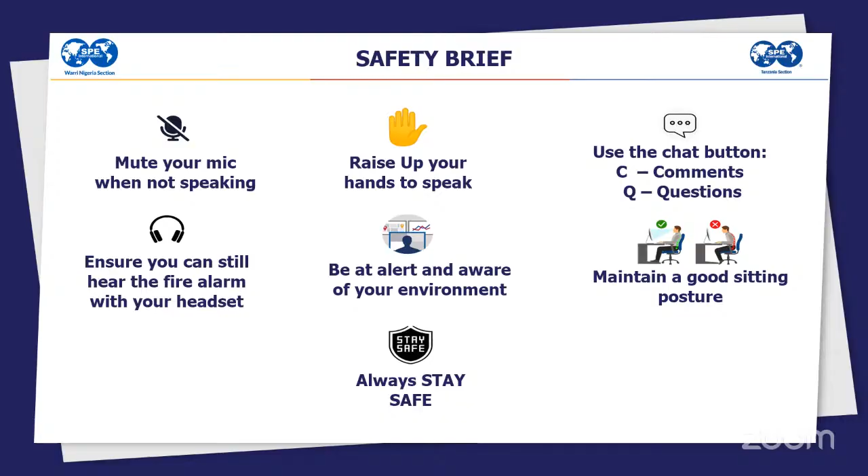Yes, thank you, Ilat. Once again, good evening everyone on the call. You are welcome to this YP's technical session. It's always a period where we gain meaningful knowledge from our industry experts, most especially in this critical era of our operations in the oil and gas industry. So you are once again welcome to this session, and I believe every one of us came here with the mindset to gain one or two pieces of information in this area, especially the dynamics and the relevance of process engineering for sustainable upstream and midstream operations.

Luckily, we have a senior engineer here in the oil and gas industry in the area of process engineering with vast experience at Ardell Holdings. So I just want us to keep our minds open, because when we look at the area of process engineering, it's one of the critical and vital areas for sustainable upstream and midstream operations by way of optimization, efficiency, by way of reducing environmental impacts of operations, and ensuring safety is adhered to. So it is one key area we need to look at to strike a balance between our economic goals, ecology, and our social demands to meet this sustainability we are talking about.

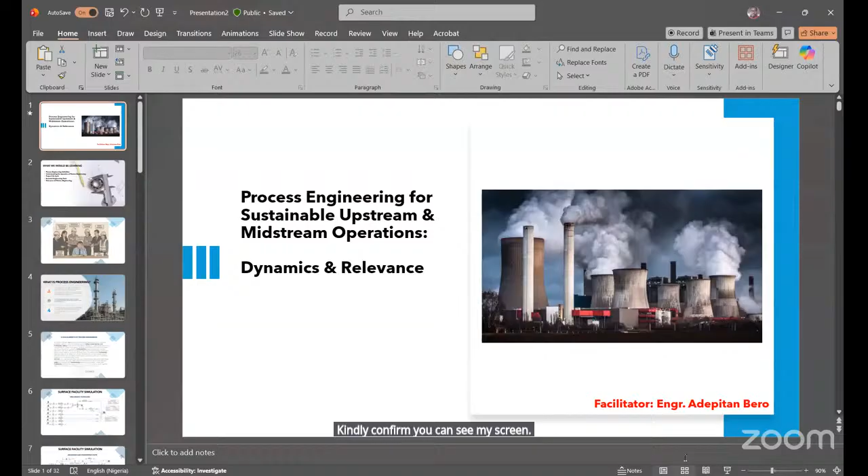Sorry, just a moment. Kindly confirm you can see my screen. Sir, we can see your screen. Okay, all right, beautiful.

Thanks again for this invite. So we'll be looking into process engineering for sustainable upstream and midstream operation, the dynamics and relevance, generally.

So what we will be learning from this technical lecture is organized into five blocks, saturated with a couple of things that will be taken away from this lecture. We're going to look at what the definition of process engineering is, understanding the dynamics of this engineering as it relates to process. Then you'll see a project life cycle, because as a discipline engineer, you'll also be participating in a lot of oil and gas activity and works. You could either be a project engineer on a specific project, or a discipline engineer working with other team members and all of that.

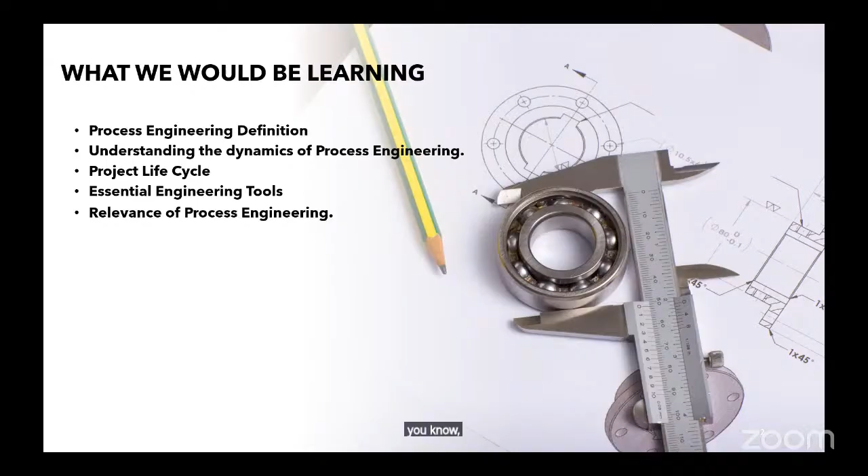Alongside all of these critical, essential things you will be doing, you actually can do nothing without having some engineering tools, which are very critical to building and all you have to do when it comes to process design, and all you need to achieve when it comes to project management. Then you're also going to see the relevance of process engineering in the industry.

Now, please confirm you can see this screen. Yes, sir, we can see the screen. You can continue.

So now, don't be moved by the idea of everybody pointing fingers and trying to blame the guy. This is actually not the way we work in the industry. We work together, coming together to do all of that. But what you see here depicts what you are likely to encounter if, as a process engineer, you do not understand your importance in the industry.

At many forums and different places, I've had engagement with a couple of engineers, young ones, even colleagues. I usually see that whether you like it or not, the process engineer dictates every single thing you see on the surface. And what do I mean by surface? I'm talking about practically everything you can see in terms of the civil engineering works, the instruments that will come at a time, the equipment, the mechanical works, and all of that. The process engineer dictates every single thing you see on the surface facility.

Once you get it wrong, there's a 50% chance that everything could go wrong, and you have to go back to the drawing board to make sure everything is properly done. You can't be a process engineer without understanding some basic fundamentals, because this dictates every other single element that comes on stream. Typically, let's say you want to start a facility, you want to build a facility.

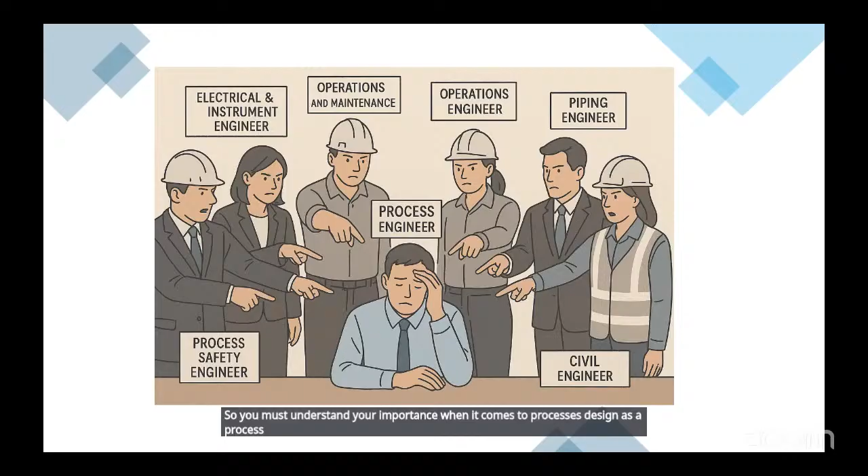So what is a process engineer? We could look at it in a different fashion.

Like I like to joke with friends, say it as it is. We can look at it in a very artistic manner. I mean, you can talk about it.

It's actually where pressure, temperature, pipes, staves, and valves act as notes. The sketch of invisible forces tames chaos into flow, because you deal with a lot when it comes to flow essentially. There's so much that happens when you look at the dynamics of flow and all of that.

I want to balance safety as well, and try to be as profitable as you can, while also making sure that the environment is not fouled, and you're doing the best you can to keep our environment safe. You can also look at it from the basic way. If you're talking to a new entrant, we all did physics and chemistry as it is.

When you look at it, we say process engineering is where physics becomes architecture and hydrocarbons learn to dance to the tune of chemistry. The pipes you're looking at are physics in nature, mechanical, and they help guide the chemistry of flow that happens in the pipe.

Looking at it essentially as a process engineer, from this terminology and full definition, in the oil and gas industry it is a discipline, right? Where the discipline engineer controls the physical elements, transforms the chemical reaction, and converts hydrocarbon streams into reliable products, while optimizing safety, efficiency, and environmental stewardship.

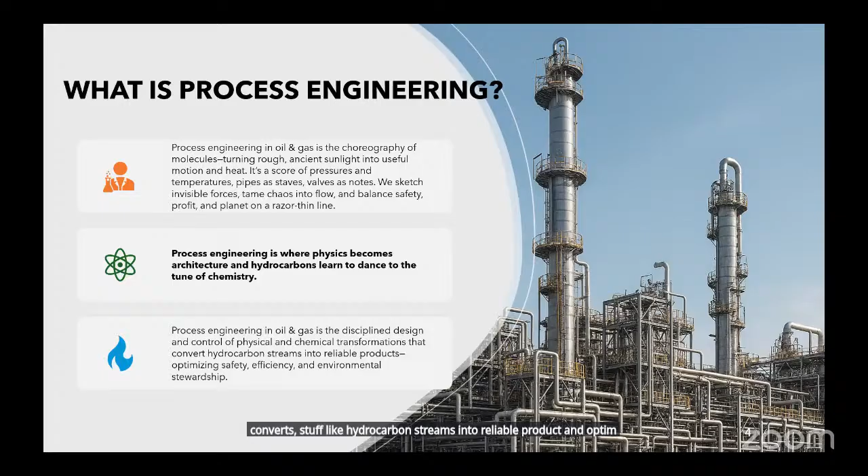As a process engineer, there are three cores that we like to speak to, which are the guiding principles to all of that you look at, because you are building a process. One thing you must take cognizance of are these three elements that are very critical.

Building a project from scratch, from the moment you get a project charter from the management, when it comes to the executive level, to the practitioner themselves, all the way to the shop floor - so you have those elements.

Safety is very critical. When it is not safe to operate, then it is not worth the investment. It makes no sense. Sustainability -

are you building for tomorrow? Is it scalable? How does it interact with the environment, all of that? You need to look at a couple of things, how you handle your water, your flaring systems, quite a number of things. You can build a facility, for example, and I'm sure it's something a lot of us are familiar with in our industry.

One of the things that is frowned upon is the flaring of gas. Of course, you flare gas, but there is also a commercial side to it - flaring is something you can actually commercialize.

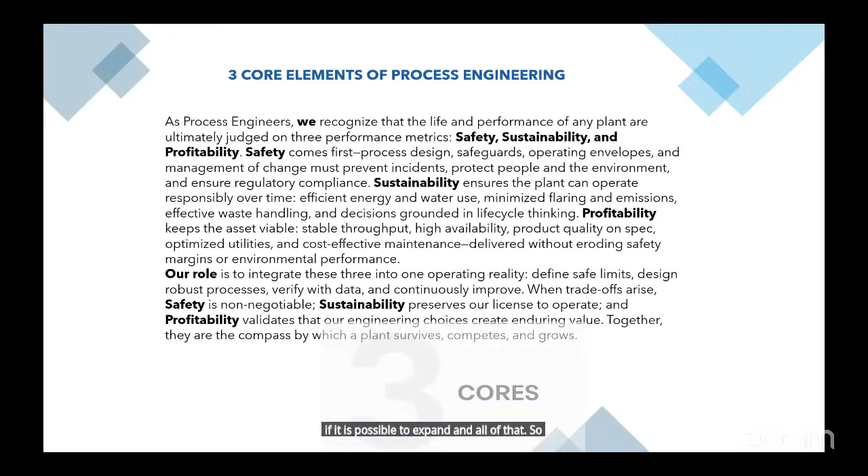Now, why do I have this screen to share with us? I'm sorry, a couple of us may have come across what I have on my screen - it's actually a surface facility design, a very integrated facility. This is some of the past design I've done, and these are simulations we built that speak to what our live plant is.

So these are the different streams of wells. You have the flow lines, the valves, the manifold. With the way this integration is - of course I didn't capture it here - the NAG separator helps stabilize the condensate, which is the gas well, the non-associated gas coming into the facility, stabilizing it at about 950 psi.

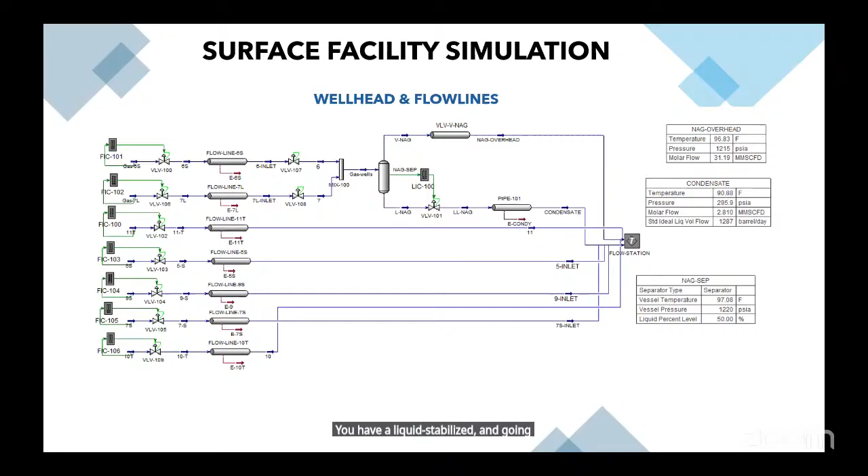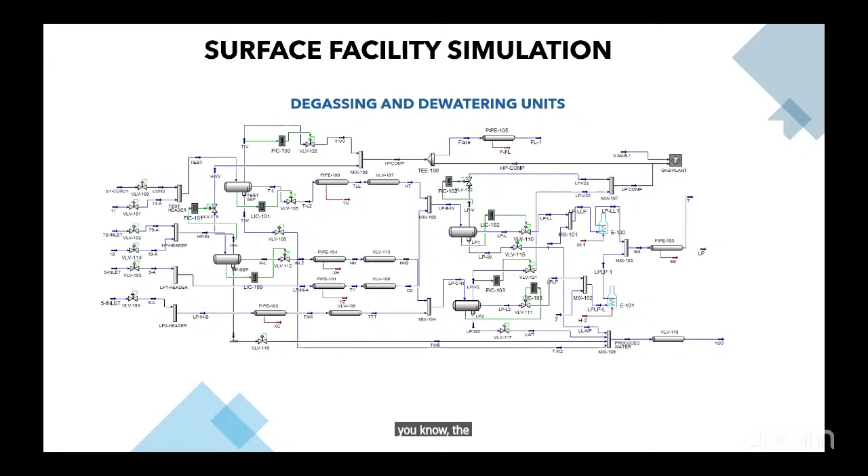You have a liquid stabilized going down into another integrated facility, the flow station. You also have different streams of wells that are AG wells, which I call associated gas wells, typically API around 35, 36, 42, all the way down to the heavy. So this is the place with the gas and water streams of fluid, and you have the overhead going into the gas plant compression system.

This is the compression system where the gas goes into a couple of units like the scrubber. The scrubber helps scrub off the gas entrained with liquid, like H2O. Of course, you have an element of hydrocarbon condensate as well. That moves through different compression stages, depending on the compression ratio, probably taking it from 150 psi all the way to 350, then up to 950.

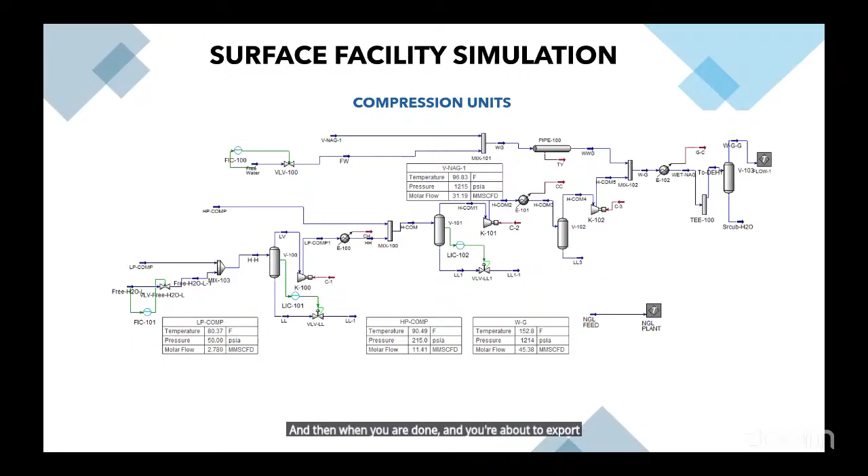When you are done, you're about to export. You're now taking it into some form of trade, to the height, the level, the stage at which it can then be injected into the LNG stream. When I mean LNG line, that's where you export out.

In this particular unit, the gas stream has to go into the contactor, making contact with a liquid desiccant called triethylene glycol to help mop up and strip off H2O from the gas stream so that it is dry and meets the right specifications. Onward, you do the reboiling system, having a recycle system, all of that happens in this system. Then you check the specification, and if it's right before it goes into the LNG line, you push to export.

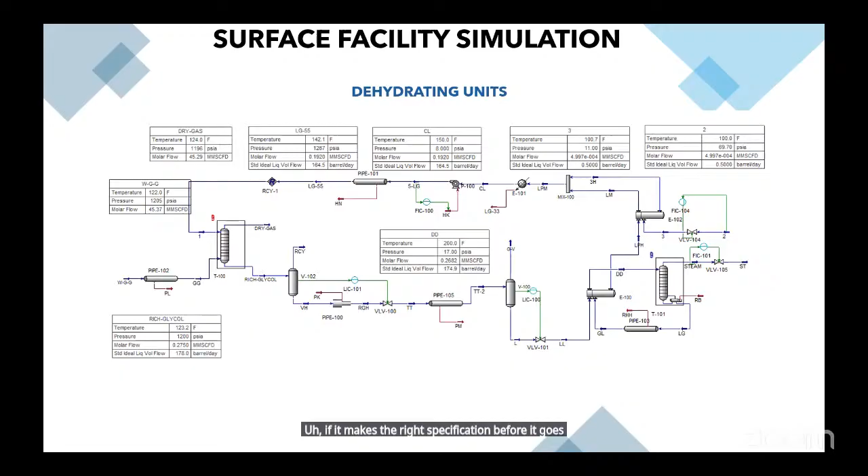Now, what I just showed is simply one of the elements of what you do as a process engineer, which is there are certain things you must put together in order to get to that point.

Design, simulating the process—you want to know what happens. Like I mentioned, a couple of things we speak to when you talk about the design basis element and all of that.

However, you could have all those elements beside, jotted out somewhere. You have done research on the requirements. Perhaps the executive has told you, look, we'll be doing 100 million SCF, that's our target from the subsurface and all of that. You put all of those together and you're about to simulate, going into all kinds of things.

So there are a couple of engineering tools that are very critical to what we do as process engineers. I want to quickly run through a few because I know I'm probably running out of time. So now, talking about process design...

I have a couple of other software you can use for the same objective. Unisim also does something related, made by Honeywell. They have Pipesim, typically for flow assurance, checking what happens in your pipe, the different kinds of flow you can have—whether it's going to be slug flow, multi-phase, and all kinds of things.

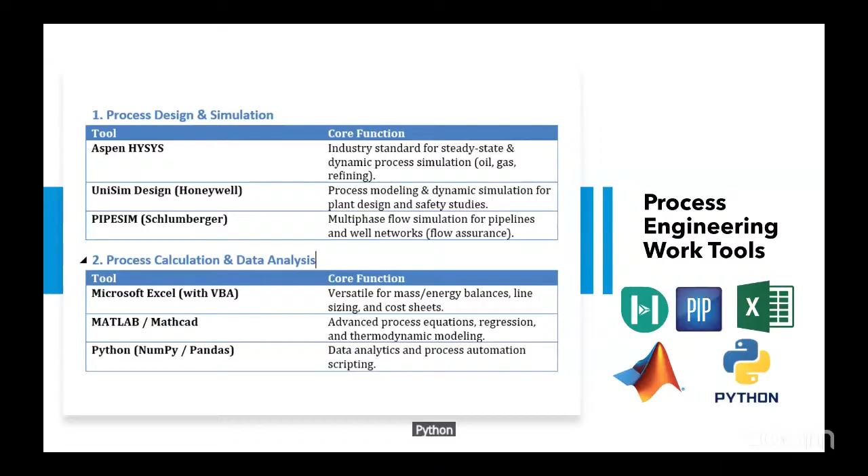AutoCAD is very, very critical. These are some of the platforms, of course I have all of that here. You may never get to use some of them, but there are certain ones you can't run away from.

Because these are some of the dictates of what you do today as a design engineer, even as architect or other discipline, they use some of these tools. AutoCAD Plant 3D is where you'll be doing your P&ID, block flow diagram, all those elements required for the project phases. You'll also be looking at how to analyze your process, whether it is safe. Aspen Flare System Analyzer, you want to see what is the required threshold, what you're putting somewhere, what kind of PSV are you having, what kind of release system you're adopting.

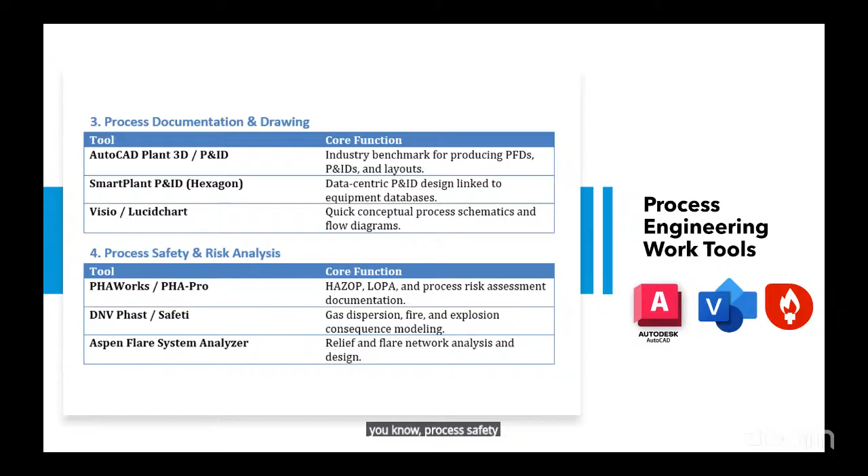Understanding the basis of your design, understanding what is required, understanding their limitations and all of that. You're going to subject them to process safety and risk analysis. Equipment design, yes, HTRI, some of us, there are industries where we may never come across heat exchanger designing.

I have worked in a facility that has all of this, and this is one of the beautiful things about Aradel. Aradel has an integrated facility with a gas plant that helps dehydrate gas from NAG wells. You have a flow station with AG wells, also degassing the crude, around the envelope of maybe 150 PSI to 250 in operation. The stabilized crude, if it's fit for the refinery, we also send to the refinery.

So Aradel has all of the industry that you can think of, except when we're already going into alternative power sources of energy. And that's what Aradel stands for today.

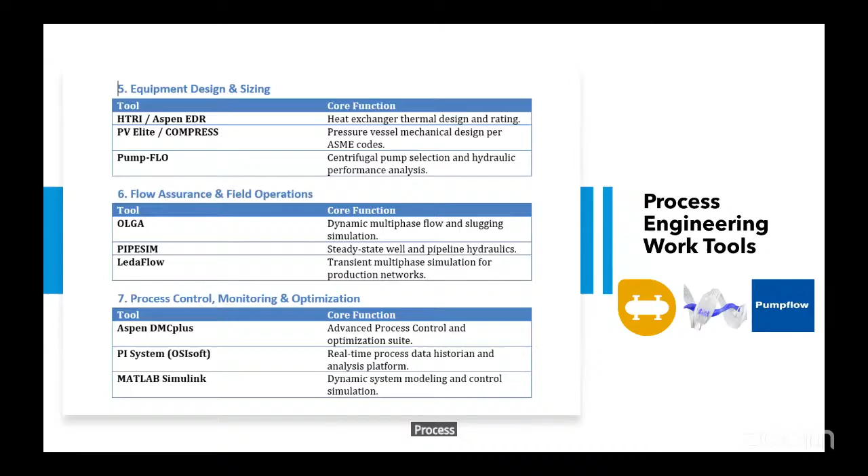So you'll be coming across a whole lot of this equipment, even the pumps. Just think about it. This is one thing I've come to appreciate a lot in my career when it comes to process design. You'll also be coming across things like flow assurance checks, and process control as well, like MATLAB. You'll be doing all of these things.

Projects and collaboration. As we begin to talk about project management, because like I said earlier, you're not just going to be a discipline engineer as a practitioner looking only at your discipline. You'll be working, I manage projects as well. I have a couple of projects I've managed in the past and some I'm doing right now. So obviously, beyond being a discipline engineer in electrical and instrumentation, mechanical, or facility engineering, you will still be managing projects as a project manager, and you will be interacting with a couple of people.

So you must know how to use MS Project, Primavera, and all of that. Your SharePoint, dealing with document control, and all kinds of things.

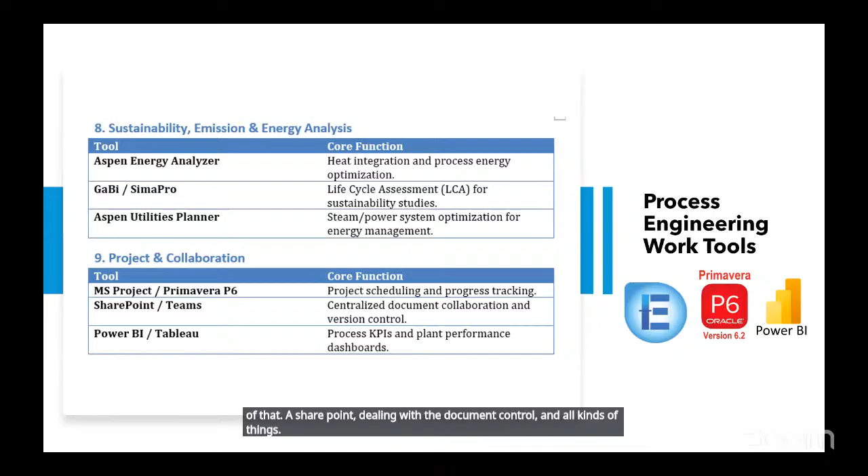Now, we said all these things. You've seen all the elements I've mentioned leading to having practicability, hands-on what you do, and all of that. But what you have on my current screen is where all of these things that you use are put together and delivered.

Typically, when you look at the engineering design process, what it takes, one thing that is sure is that our world today is always looking for something to solve, to solve a problem. And you can't go about solving a problem without first identifying it, doing the research, and let's even just look at it: do we even have that problem to start with? If you don't have that problem, then why go into it? And there's something about invention, which is challenge, and need is the dictate of a lot of inventions you see today, which is you can't go into invention if there is no need for it.

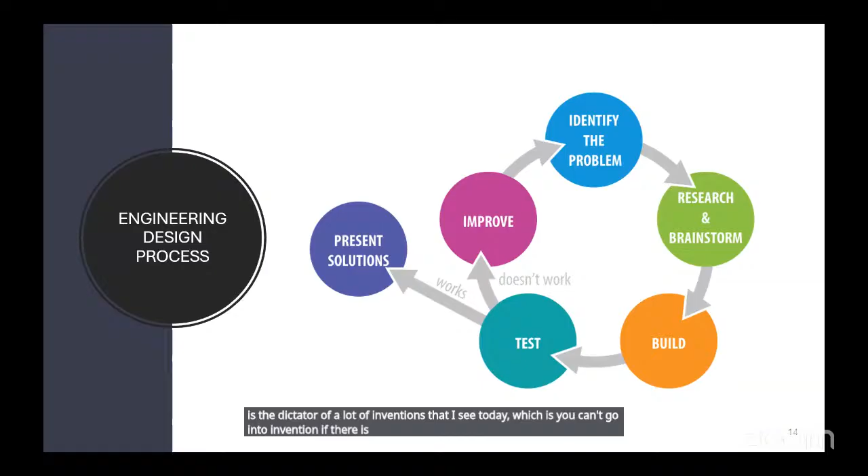I was called into the room two weeks back by my superior. It was an emergency meeting. I said, oh, we have a situation on ground. And I was in the room with a couple of persons, five, six persons.

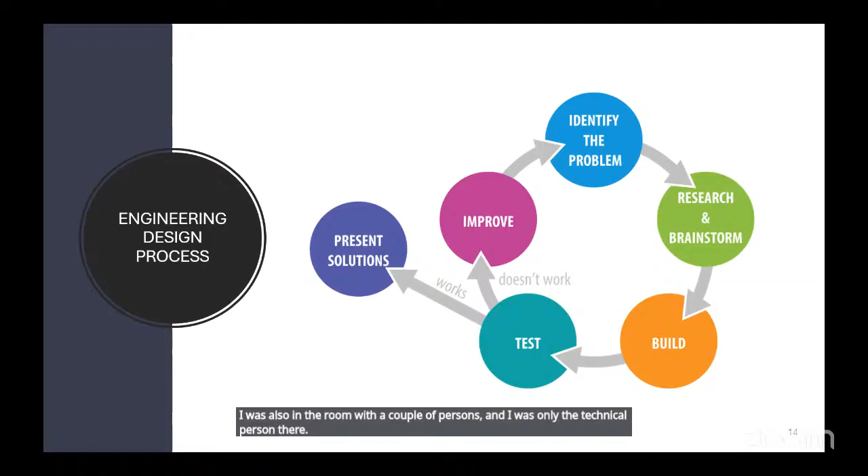So we understand that as a process engineer, there's a lot resting on your shoulders. I was in the room with the legal experts, the commercial team, and a couple of other persons, and I was the only technical person there. It was thrown at me while the conversation was going, 'oh, we have a lot of options here' - yes, that's looking at it from the commercial perspective.

One thing about technical guys is, and this is one of the things I always encourage, don't look at things just on the technical front. You also need some element of business management knowledge and skills, so that you're not just seeing it as it suits you, but as it is profitable and sustainable for the business.

So a couple of questions were thrown at me in terms of the options available for gas offtake, and they were saying, 'oh, we could do this, we could do that.' The only business I had there was telling them: if you do this, it will take about 4 years; if you do this, about 3 years; this one, about 2 years - this is the shortest possible timeframe, the low-hanging fruit you can actually do. These are answers I'm able to give them, but it doesn't dictate the immediate decision that will be taken.

So you identify the problem, you go and research, you brainstorm in the room, and all of that. When you see the build I mentioned, the build is not the physical asset you're seeing immediately - what you're doing is putting it into design and running it as a small scale fraction, more like a pilot system. You build it, and when you're done building it, you put it to test.

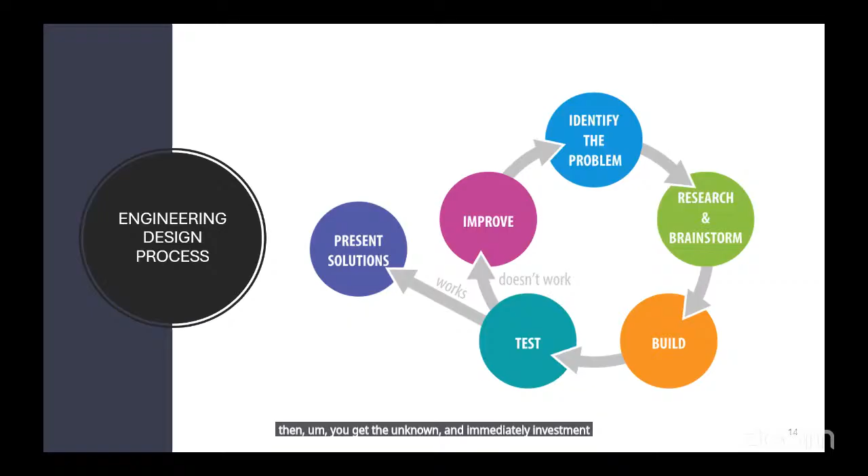Now, what you have here is a typical project engineering phases that you as a discipline engineer, wherever you find yourself, you are going to go through. This is not project management, but whether you like it or not, you need to understand what I'm about to share with you within the next 4 blocks of slides, because as a process engineer, you will go through all these phases whether you like it or not.

From the framing stage, I was called into the room and we were just looking at the opportunities, the constraints, the feedstock. What is the feedstock we have? What is the API of the crude? What's the density? Is it fit for purpose? Can we do this? The process engineer is already there looking at things from the chemistry perspective. Is this possible? I'll say, let me get back to you, let me run some simulation and tell us whether it is fit for purpose.

Once you can conceptualize and appraise what it is, okay, I think we can do this. You begin to generate some very fundamental things like a block flow diagram. You're looking at it, okay, in this technology, you have to go from here, it has to go from a separator to a dehydrator, to go from here, the water, and all of that. You're putting all those blocks together, something sketchy, which you are going to share with the team. You're also looking at what environment you are operating in.

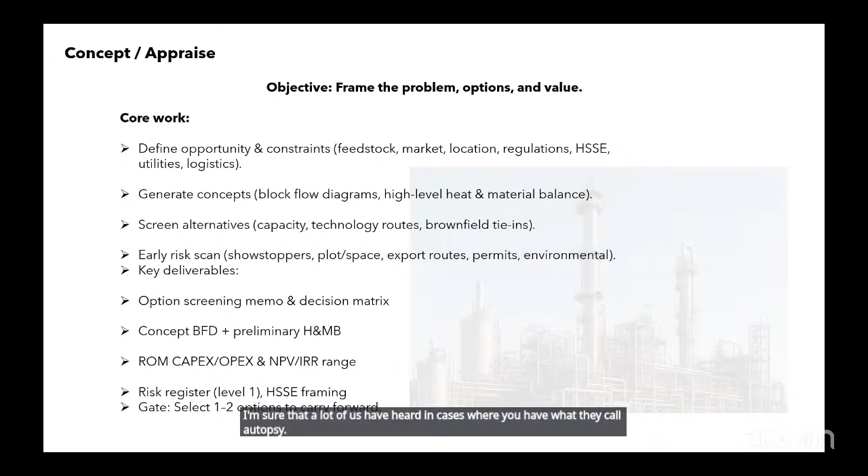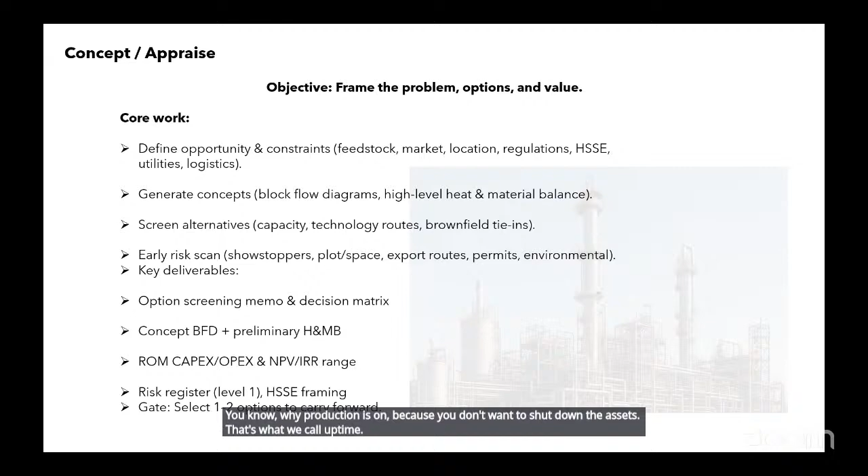I'm sure a lot of us have heard of cases where you have what they call hot tapping, a live system, which is acceptable in the industry, where you can tie into a live system while production is on, because you don't want to shut down the asset. That's what you call hot tapping. These are some of the metrics that you look at.

Now, after all of that you have done, the concept selection, you're now looking at the feasibility study, going into some extra kind of works, looking at the economics of what you want to do, put it in simulation, looking at what is available, generating initial heat and material balance. When you take the heat and material balance and show it to your other colleagues, some other person may just come to you and say, I don't think this is something that we can handle.

How do we manage it this way? Or I think we need to go through this other route. You may have a heat and material balance, and at the end of the day, when you are putting the equipment together, it could cost you as much as $2 million in terms of the equipment you're going to assemble. But there are other possible ways that you could probably do something.

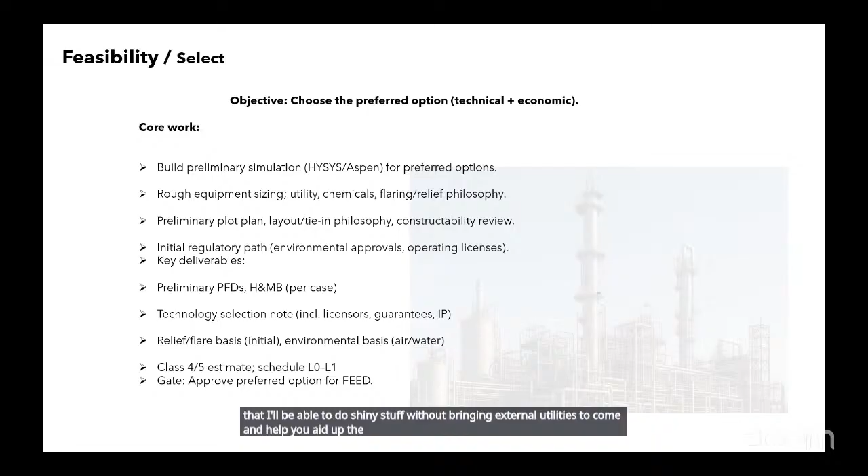For example, in the past, the way heat exchangers are managed, you are probably using external utility to heat up a system before they can gain it, and you are not maximizing efficiency, you're not running the facility efficiently. But these days, the way some of these things are done is that inherent products that are within the system, that are heated up or probably cooled, can help you heat up the system and all of that. You're able to do certain stuff without bringing external utilities to help you heat up the system. So these are some of the things that you look at when it comes to the core works around this space.

The feed is something that is very, very critical. At this point, you have gone beyond something that lies within your organization, because the first two I mentioned are largely things you could discuss with your team, something fundamental. But when it comes to feed, you're probably now going to an engineering design firm, because I operate in a place where we are an operator. We operate and we outsource many of our designs out. And you, as a subject matter expert, your role is to know all of these project stages and what we call stage gates.

So the feed, which is the front end engineering design, is where you must start with making sure that you are getting at least 60 to 90% of everything you want to do. In fact, 90%, just to make sure you get it right at the feed level. So when you put this information together, you have the feed package, the design report, the model report, and now move to the next stage.

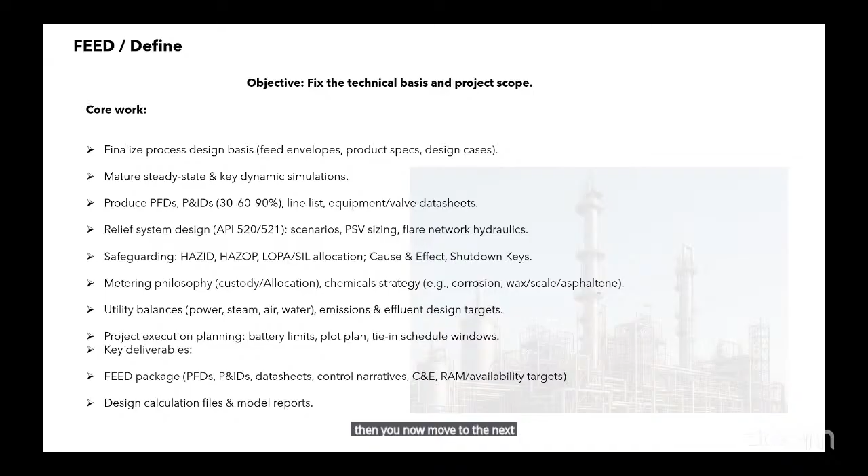Oftentimes at the feed level, when you are done with the feed, management will look at it and tell you, look, we don't want to go on with this project. It doesn't look economical. It's not commercial. It doesn't bring value to the business. So we are trying to go away from it. Let's think of something else, and all of that.

But once you get management approval, you now go into what you call the detailed engineering design. In this phase, you can have what you call EPIC, which is engineering, procurement, installation, and commissioning all together. So in this phase, you get very detailed, the number of hours required, things required to finish the contract, finish the project, and all that. Because the detailed engineering design will largely speak to all of the design components, every element needed to finish the project from A to Z. This is what will be evaluated in terms of the cost required, the budget required in terms of expenditure to carry out this project.

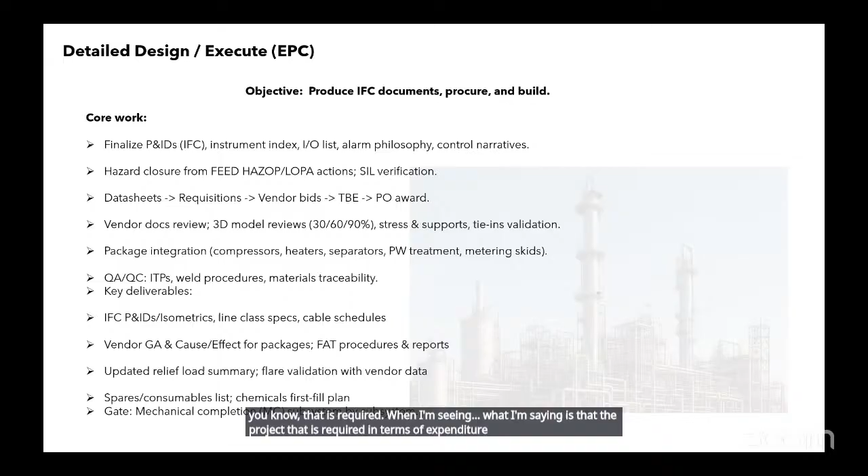Then when you are done with the DED and the building of everything, the system is already on ground, you built the nice thing you're looking at. As a process engineer, again, you come to this place. You are now crossing the T's and dotting the I's and looking at the things. What are the design bases? Did they meet the specification? What were the things I gave them when it was being designed? Let's look at whether those specifications were met, whether the right things were done.

At the pre-commissioning stage, which is static, the plant is still there, done. So you are now looking at what you call the punch list item. You are looking at what is important, practically every element of the deliverables, and closing them out. Are the systems properly tagged, mapped, so that when the operators are ready to operate it, they know what goes where, what valve to open, what leads to where, and all of that. You must make sure that system is ready for purpose and ready to operate.

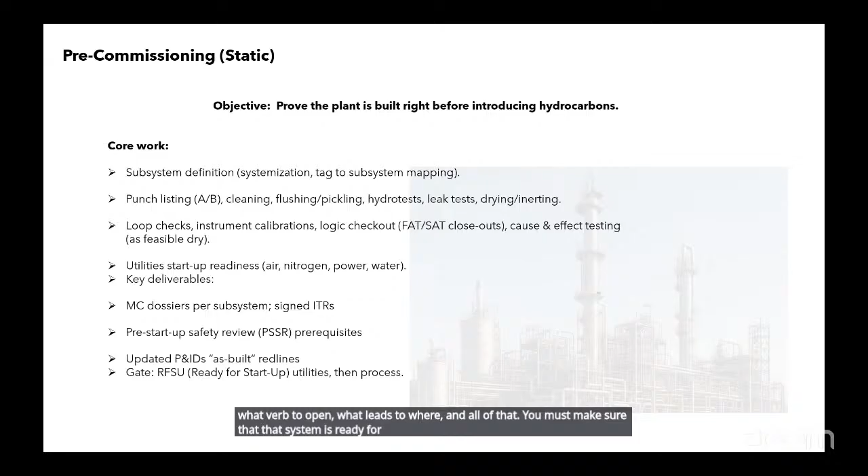Then we go to commissioning. Now, in this case, you are coming with the simulation I showed earlier, which has two parts: the static, which is the steady state condition, and the dynamic situation. Some of us can relate to what you call the ideal gas and the real gas. The ideal gas is, okay, that is what it should be, all things being equal. But we all know that all of these things are subject to environmental conditions. The weather could change, the pressure could change, the fuel characteristics could change. So you need to look at all of these elements for your commissioning to be sure that the dynamics are matching what you have predicted, right?

Once you are looking at all of these things, you are following the procedures critical to the commissioning of the plant: how you should start it, what are the necessary elements that should be up when you are commissioning this plant. Once you are satisfied with all of that, you continue to run. There are cases where you have to shut down, evaluate again, see what is not right, fix it, start up again. Then you continue to do performance tests to be guaranteed that everything is up to spec.

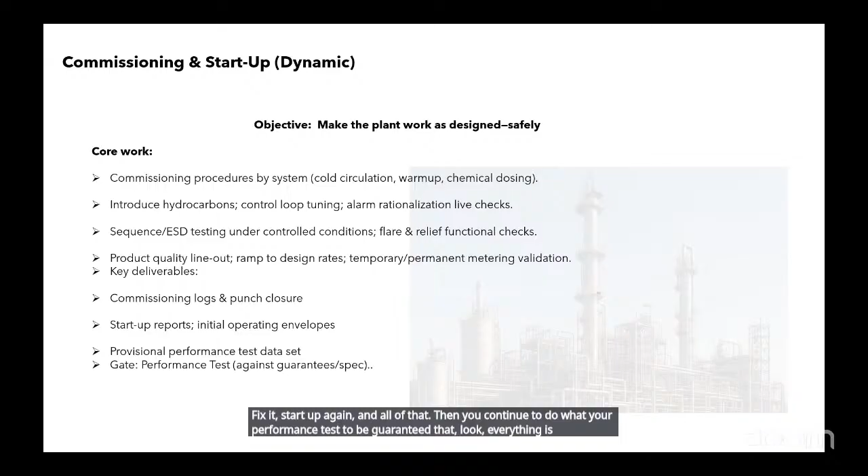Performance test and handover. While you are doing all of that commissioning, the operators are waiting for you. The management is looking at what is to come. They're already getting feelers that the facility is being commissioned. Train 2's distillation tower is running. The pumps are responding the way they should. The heaters are up, the boilers are working perfectly well, no leaks anywhere. The tanks are receiving product, and everybody is waiting for what the specification of the end product is going to be.

This is usually what elates the mind of the executive to say, we planned it and we are getting this value from this asset. Immediately the product comes out from the tank, the laboratory engineer puts it to test and tells them, look, the specification coming out from this asset is wonderful. And everybody starts to celebrate.

And the process engineer is also giving reports back. So you have all the necessary certificates, tests, everything that is required. You are not messing up the environment, while making sure you have a quality specification and all of that. Everything is just on point, you are maximizing opportunity, you are optimizing adequately. So when you are able to do this, everybody smiles, we begin to smile to the bank, and you are ready to hand over to the operators.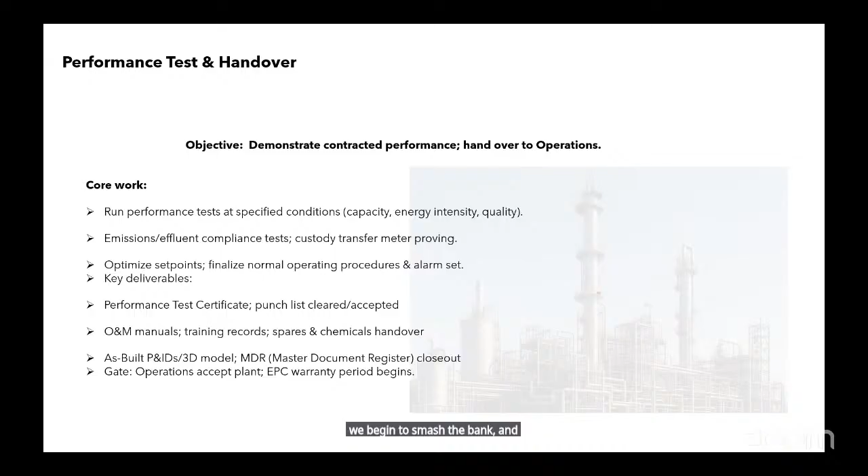Now, when you hand over to the operator, your job is still on. You still haven't finished what you're doing as a process engineer. Because after you're done with the entire design phase and commissioning phase, for the next 6 months to 1 year you are still getting reports from the operators, trending the performance of this unit to see what is happening. It is even important that when a facility starts to run, you must continue to trend from day one to see how it is doing.

If you are doing well from day one and you have locked it in somewhere and you are trending it every day, the day you see your heater not doing well, or a particular exchanger not doing well, you're able to trend to say, oh, this is where my problem lies. Let's bring out this plant and do some sort of maintenance. Or probably there's heat exchanger fouling, and this is why the heat exchanger isn't working efficiently — the heat exchange is poor, and the outlet temperature doesn't make sense.

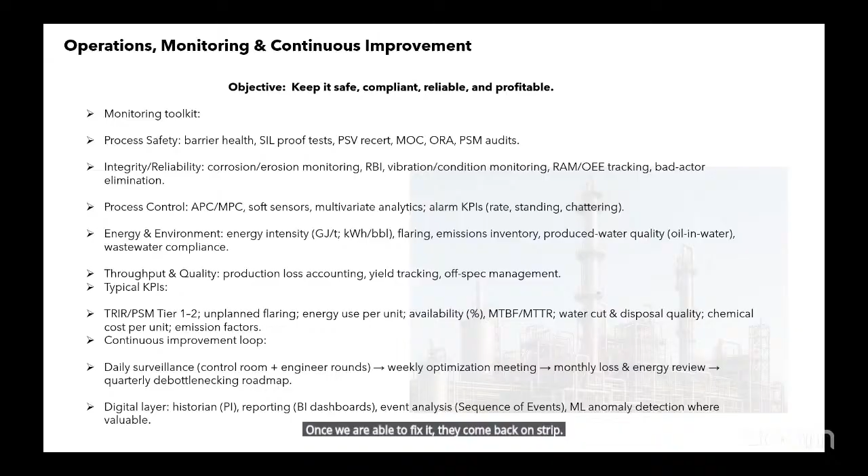I have a young colleague who came, and we were discussing something similar, and it was actually that direction we were looking at — something's probably wrong somewhere. Let's optimize, let's inspect, let's investigate. Once we are able to fix it, you come back on stream and you are getting value for your assets. That's all when it comes to being practical about having hands-on experience and all of that.

But let's get into why your role as a process engineer, why process engineering as a discipline, is very relevant in our industry. Historical context: the part of process engineering itself emerged during the 19th century. A couple of things were happening. The way it was, was something that was very small scale, until the Industrial Revolution happened, which laid the foundation for mechanization.

So when we say mechanization, we're talking about going beyond what we see as very basic, and trying to make sure that we speedily get more productive in terms of scalability, making sure we are able to produce for more than 10 or 20 places, now looking at thousands. But it was funny that when these things were happening, the mechanical industry — the mechanical guys — most of these things were premised on their actions. So somebody could look and say, oh, I need this volume of liquid just to feed this community with water. Let's say you want to serve this community — it didn't matter what they felt was adequate to give to that community. Somebody could just look at it and say, okay, just go and put a 6 inch pipe there.

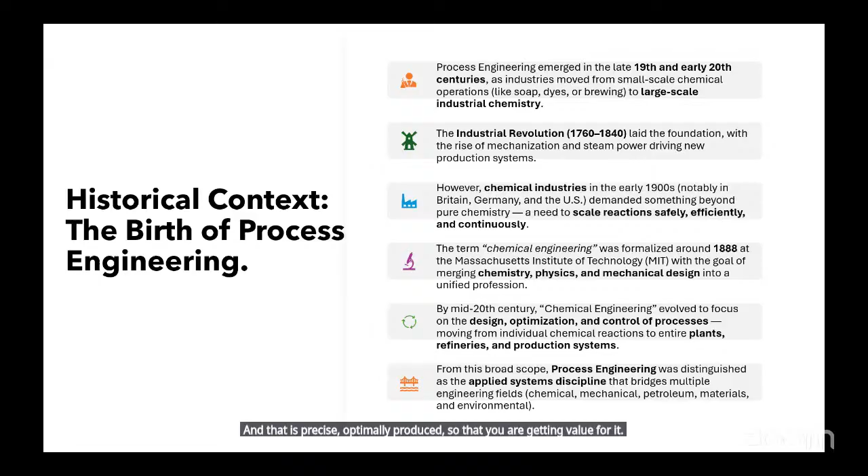So why did process engineering become necessary? Like I mentioned, all these different disciplines were working differently, making the industry get value from what they are doing and all of that. So process engineering brought all of that together, in terms of integrating the design.

Quantifying transformation. Like I mentioned, the dynamics effect, a whole lot of things happen when it comes to this industry as a process engineer. You have so much on your shoulder, and even when you are done, they are still asking for more. How can we get more from this place?

You begin to optimize, and look at it. You're also looking at how do you scale up. Quite a number of things happen as a process engineer that you'll be looking at. This was why it was necessary that in this industry, process engineering became so important to every other discipline that wants to exist in our industry.

The process engineer is the dictator of what it is. They guide these other elements.

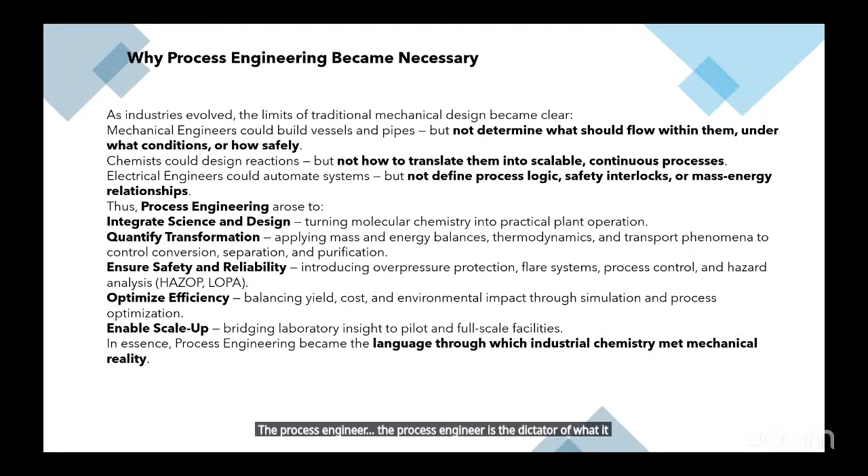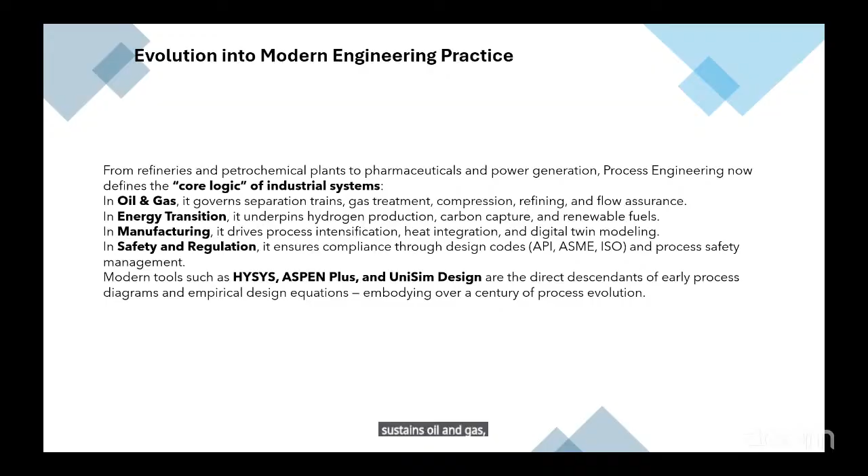So still talking about the evolution into modern engineering practice, the core logics of the industry systems, oil and gas, energy transition, manufacturing, safety and regulation, and all of that. Theoretical relevance of process engineering, a couple of things that you'll be seeing. Let me quickly run through them. I have about 20 of them.

Facility design and optimization. This is what you'll be doing as a process engineer every time. Production maximization. You want to get more value, you want to maximize effort. Flow assurance. Can this fluid move through this medium and not get stuck? It's going from point A to point B. You should be able to evaluate and say, I'll deliver so much amount without wax, without hydrate formation, and all of that. Can you do that? Process safety risk. You must carry out HAZOP.

You must carry out hazard identification. You must know all those things. Environmental stewardship - do you want to flare into your system? It just doesn't make sense. And this is one very beautiful thing that Aradel has done over time.

If some of you may want to have a walk through Aradel someday, if you get the opportunity to come visit our integrated facility, you're going to see that we are compressing our gas. We're not flaring, we are not fouling our environment. We are a very responsible business.

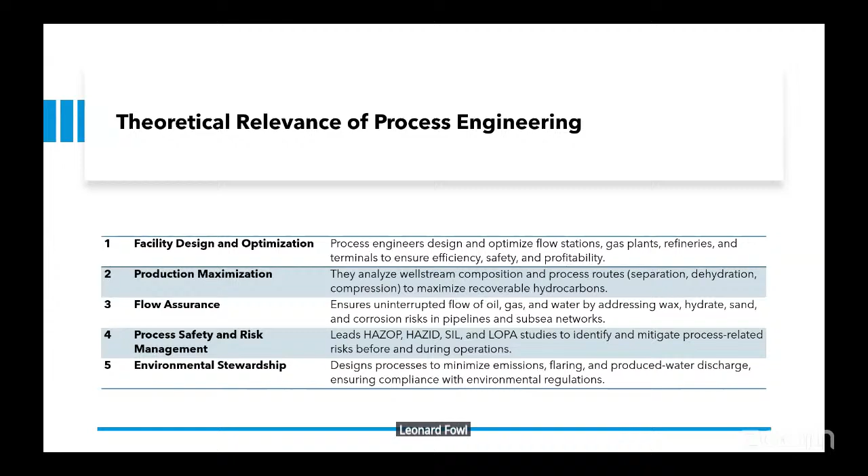Energy efficiency, like I mentioned, a couple of things you want to do - you don't want to waste energy. Some equipment are not necessary when you can use certain things, just to make sure that your operating cost is not so high. Process simulation is also what you'll be doing a lot.

We've gone beyond, of course - some of us are still the old dogs where you pick your pen, you still want to validate some things by doing them with your hands and all of that.

Sometimes when I talk to some engineers, just to make them practicalize what they do, I tell them: okay, do you still remember what the continuity flow equation is? You want to know the flow rate - okay, what do you have? Do you have these variables? Do you have velocity? If you have velocity, okay, what's the pipe size? Is this the diameter? Okay, go and give me the flow rate. And you do your Q equals to VA and all of that.

So we still do some of those things, some of them. So beyond the process simulation, we still do some of this by doing hands-on work. You have commissioning and startup support, all of that. Production chemistry integration, metering and allocation.

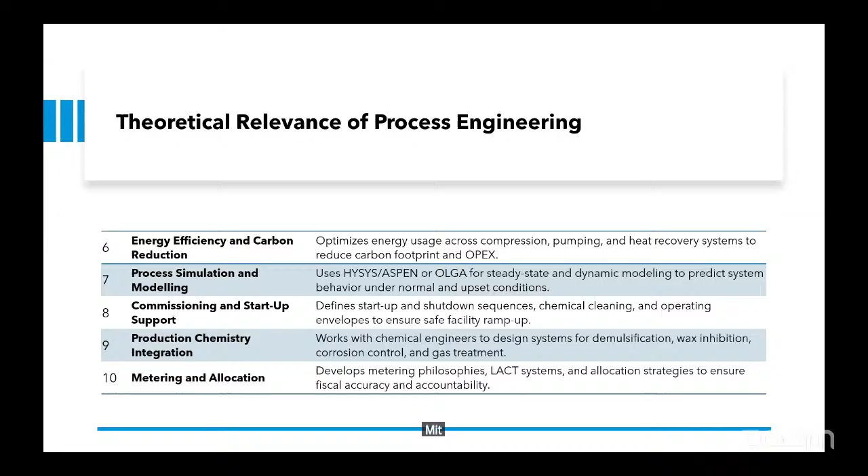You want to get value for what you are sending out so that you're not losing money. Process troubleshooting - this will always happen. The operations team will always call you: 'Bureau, I don't know, this pump is not injecting well. What's happening?'

You want to see it, but it's still doing the same flow velocity. So what's happening downstream? Let's go and check - oh, the pressure here is elevated, so there is a back pressure. There's some kind of back pressure here, and when you have back pressure, that means there's a resistance somewhere, so you're not having adequate flow. All kinds of things you'll be seeing. Troubleshooting is what you live with throughout the life of every plant.

Design basis for brownfield modification - I said this earlier, a brownfield is, in fact, one of the most complex projects you can work on, because the challenges will come. The well dynamics will change, characteristics will change over time, and you want to try and do what is right and make sure that it works fine.

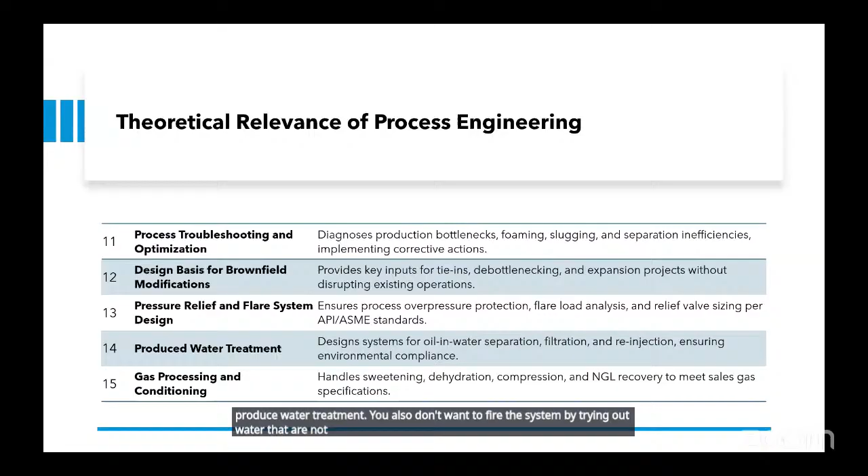Pressure relief system - you want to make sure that you are not pressurized unnecessarily. Produced water treatment - you also don't want to foul the system by throwing out water that is not properly treated and all of that. Gas processing and conditioning.

Integration of renewables, regulatory and standards compliance - you'll be dealing with a lot of regulators, stakeholders, all kinds of people you'll be meeting during your project phases. Economic evaluation - does it worth it? The investment, CapEx, OpEx, what are you looking at? Are you estimating, and all of that? What's the cost benefit of what you are doing?

Interface between disciplines - I said this, you'll be dealing with a lot of persons. Everyone will be asking you questions: what's the basis for this? Because nobody can give you what valve will manage the system. The E&I guy cannot give you the right valve if you don't tell him the volume you are looking at. As a matter of fact, you will size the valve and tell the electrical and instrument persons what valve size, in terms of the CV, that will be purchased and all of that. Interface between lifecycle and asset management - all of that you'll be managing.

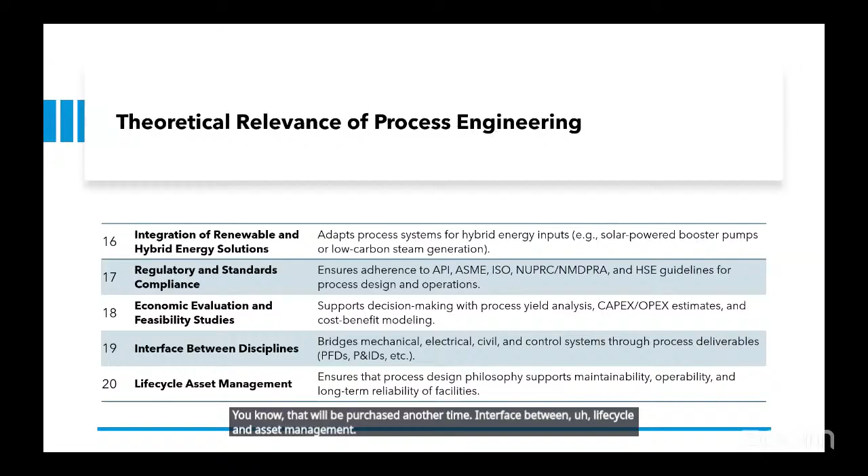Conclusion. The role of the process engineer, if you look at it, I've spoken to a couple of things you'll be doing throughout your career.

It's not just a branch of engineering. It's a deep conscience of the industry. Everyone is looking up to you. You must make sure you get it right from the start. You must be able to guide each discipline by making sure that all of the elements that are necessary are used, and every party is guided by what is required to execute their different side of the project.

So it must be reliable. It must be profitable. It must serve the purpose for the planet. We don't want to foul our planet. As we talk about global warming, I'm sure some of us have come across things about how to manage our CO2. A couple of technologies are out there, still being tested, to see how we can recover that so that we can maximize what we produce.

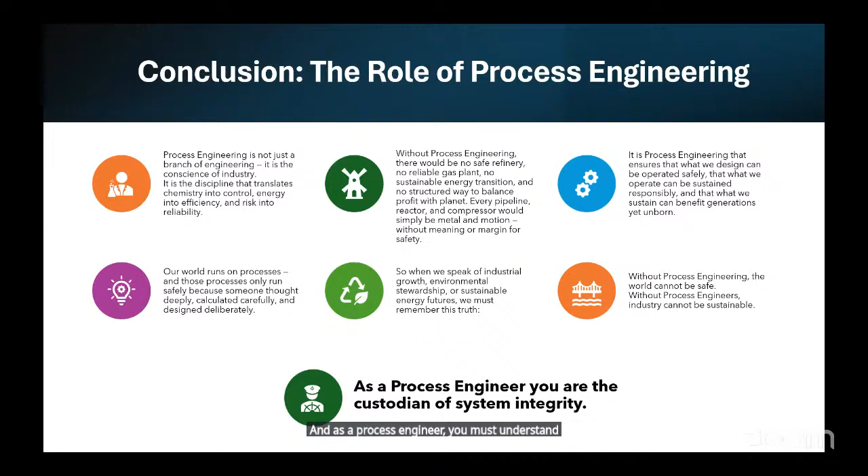And also making sure that we do not foul the environment. Our world runs around these processes, and they should be run safely. Knowing that without process engineering, our world can never be safe. It's just a fact, can never ever be safe. We have to be very mindful of this. And as a process engineer, you must understand that you are the custodian of system integrity. Thank you.